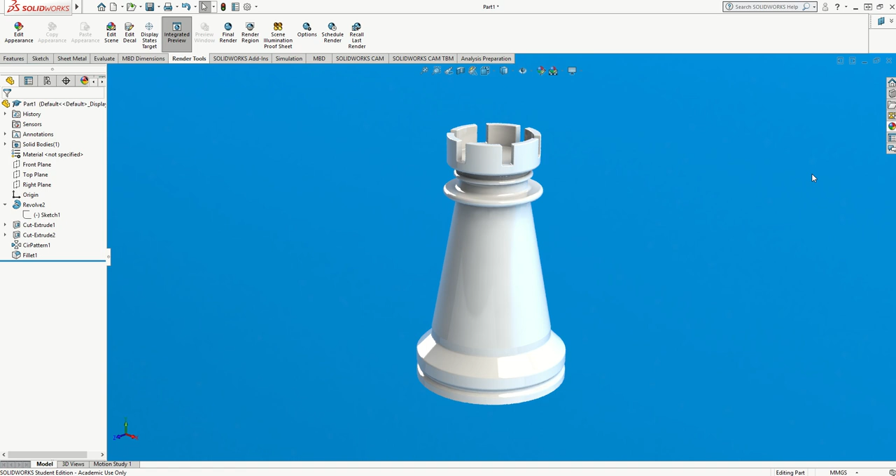In this video I'm going to show you how to draw a rook chess piece using mainly the revolve tool and a patterned cut around the top to make the castellations. I'm going to minimize the finished drawing and start with a new part,

and I'm going to draw my shape, or my section of my shape, on either the front plane or the right plane. I need one of the two vertical planes. I don't want the chess piece to be lying on its side when it's finished. And what I'm then going to do is draw a vertical line as a centre, which will later on become my revolved axis. So I'm going to make sure that's vertical, and I'm going to click OK.

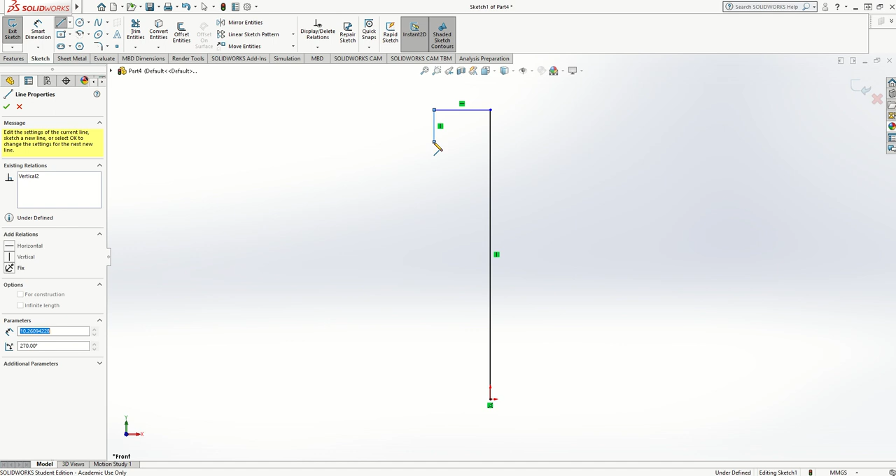I'm just going to use the mouse wheel now to zoom into a better position so the line fills the screen, and then I'm ready to start sketching my cross section of my chess piece. So I'm going to make up a shape that looks hopefully similar to a rook. Lots of different variations of this, so this is only one of my thoughts on this. Lots of small lines. Then I'm going to make it taper outwards slightly towards the base. Give it a bit more feature.

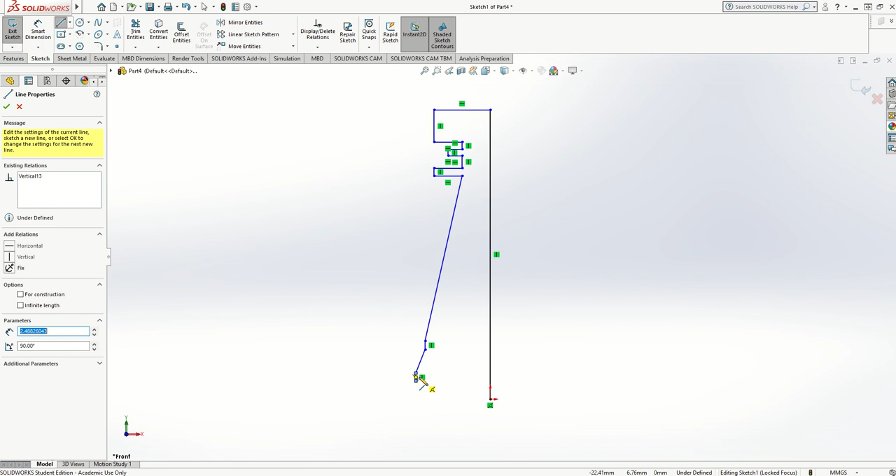And as I close the shape up, it should hopefully go grey, which it has, and that tells me that it's ready to accept a feature if I choose to apply one. But what I'm going to do first, I'm going to get rid of some of these sharp corners and make them softer by radiusing them. So I'm going to use my fillet tool, and I'm going to set quite a small fillet.

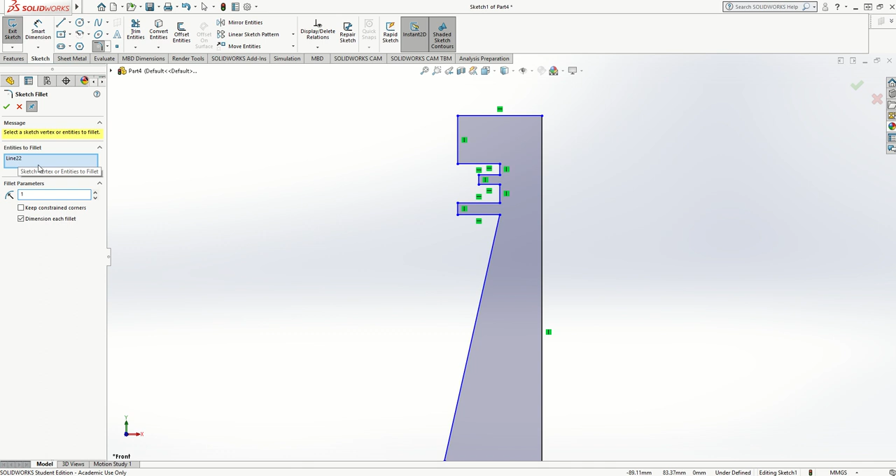I haven't done any dimensions on here, so I don't really know what's going to happen when I apply a fillet, but I can see line 22 still selected, so that's the one at the bottom. I'm just going to select that and get rid of that by pressing delete on the keyboard because I don't want to fillet anything down there. And then I'm going to apply my fillets on these upper parts, and that looks about the right size. So I'm just going to work my way down, applying fillets on there, and the same at the bottom.

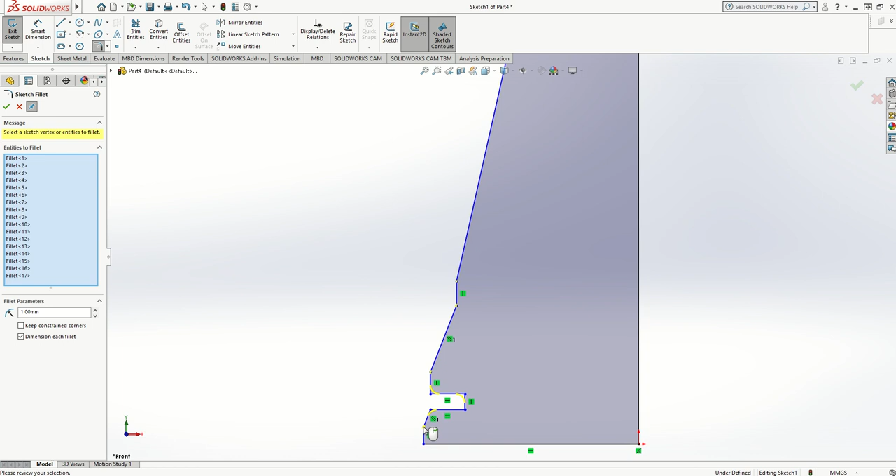This makes a big difference when you render the shape at the end because, oh, it doesn't like that one because it's a bit too small, so I'll miss that one and go back to it in a minute. Click all of those. I didn't like this one because it couldn't put another 1mm radius on, so I'm just going to select a smaller radius. I'll type in 0.5. Try that. There you go. That's worked. Click on OK. And I've now got what I would say is a half of a cross section of the chess piece. So the next thing to do now is make it a three-dimensional shape.

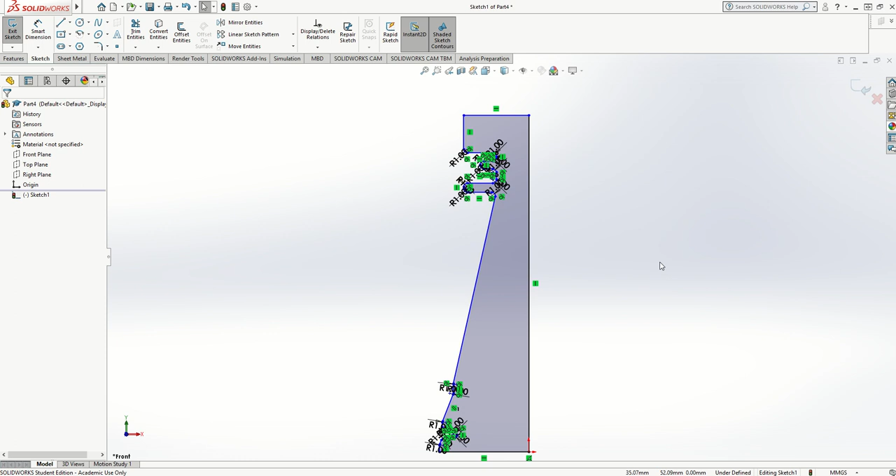So I'm going to press Ctrl and 7 on the keyboard, and then I'm going to go to my Features menu and choose a revolved boss base. Now a revolve needs an axis of revolution, and that's what that first line was that I drew. And when I click on that, you can see straight away it's guessing that it wants a 360-degree rotation. You can vary that and do part rotations rather than full rotations, but in this instance I want a 360-degree full shape. So I can now click on accept.

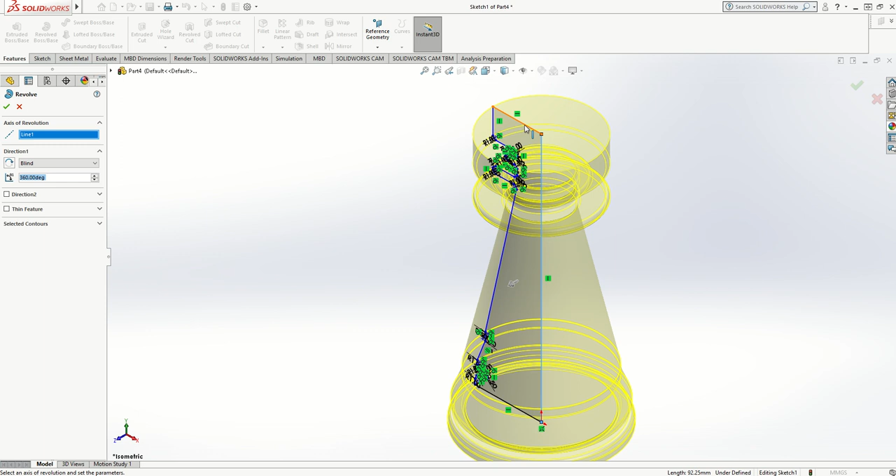Before I do that, I just want to show you what happens if you click the wrong axis. You can get all sorts of weird things happening, and it will create dish shapes and other shapes depending on the line you've drawn. So if it does do that, don't panic, just select the correct line. I'm going to click on accept, and that gives me my revolved shape.

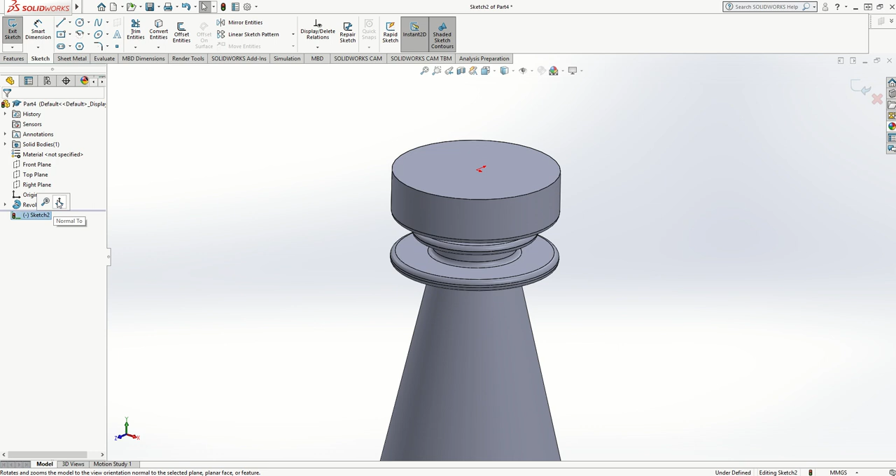Now at the top of the castle it needs to be hollow, so I'm going to select the top face and do a new sketch. Instantly a new sketch appears over on the left hand menu. If I click on that and go normal to, it will turn to face me, and that will allow me to put a sketch of a circle inside of the top circle, leave a little bit of a gap for a wall. Click on OK.

Now I'm going to go Ctrl 7 on my keyboard again, and then I'm going to do an extruded cut downwards. Extruded cut. I want to see how far that's gone, so I'm just going to rotate that up using my mouse wheel, pressing it down and rotating it around.

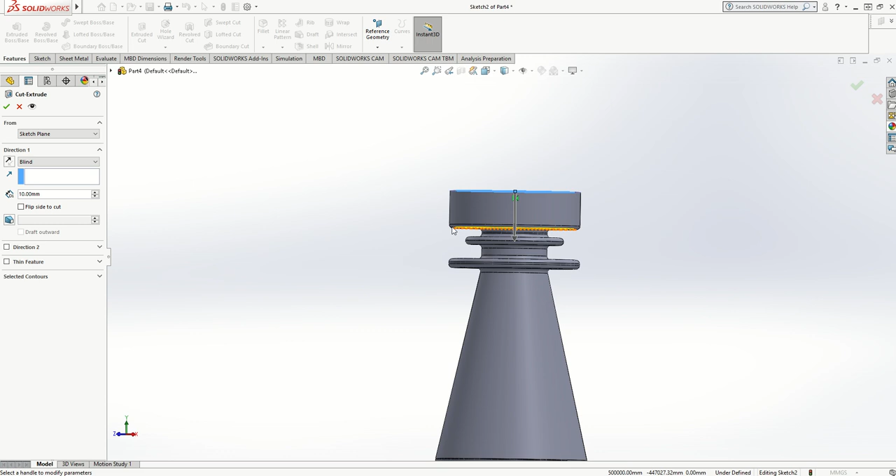That's gone too deep, it's going to almost cut through, so I'm just going to take that up a bit shallower and click accept, and I've then got my hollow section at the top.

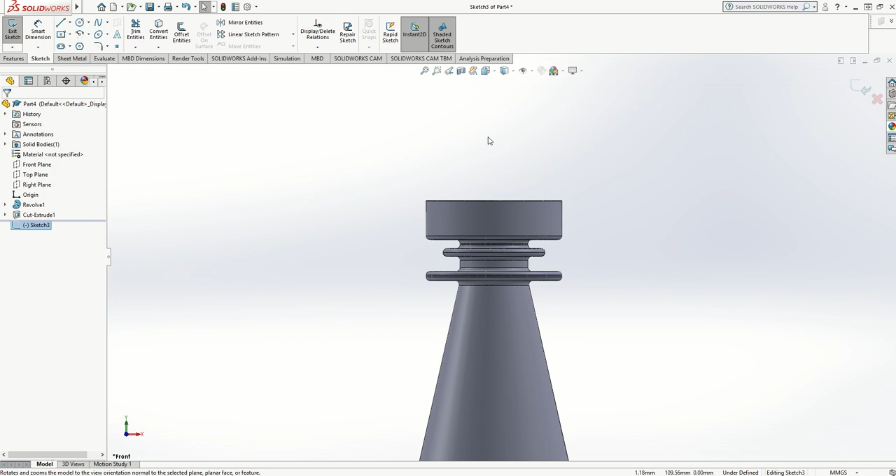The next thing now is to put the cutouts in the top for the castellations, so I need to do that by choosing either my front or my right plane. I'll choose my front plane and I'll do a sketch. Again, sketch has appeared here, which is my new sketch. I'm going to go normal to that, and then I'm going to zoom in near the top end, and I'm going to draw a center rectangle from the center line to whatever shape I want to cut out.

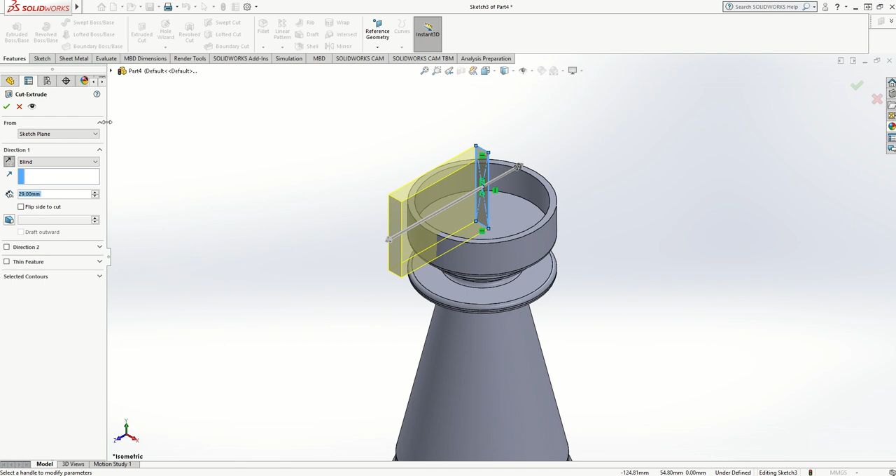Click on OK. I'm going to go back to Control 7, which takes me to isometric, and then I can do my extruded cut. Now the extruded cut will remove material, and I can go in either direction, frontwards or backwards. I'm going to choose to come frontwards, and then I'm going to click on OK, and you'll see it's removed a small cutout there.

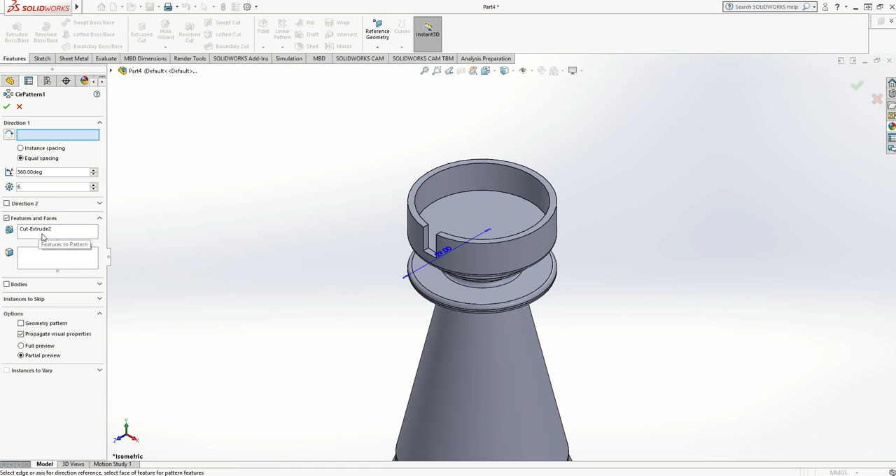If I now want to make a pattern of that around the edge, rather than trying to draw each one individually, I can go to my circular pattern from my features menu, and it will want to know what I want to pattern and what direction I want it to go in. Now, because cut extrude was the last thing I did and was selected in my previous menu, it's already guessed that might be what I want to pattern. And direction 1, I need to select the face I want to go round on.

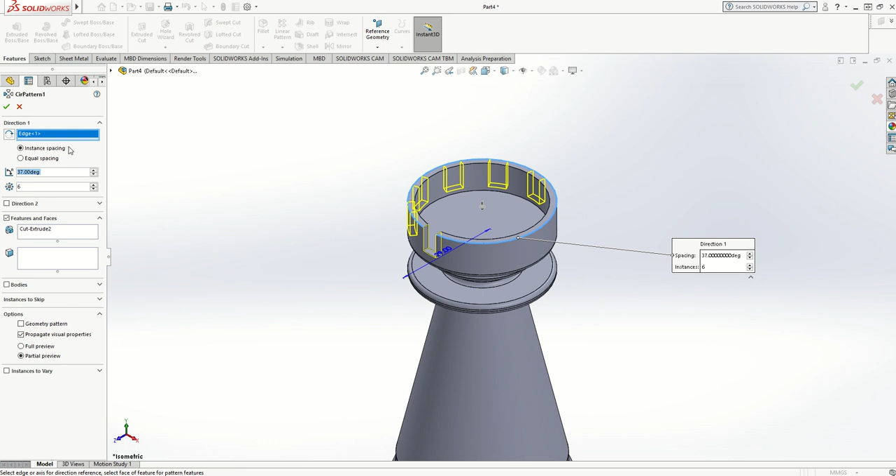Now you can see that it's guessed automatically I want 6 of these, but actually that's because I've already done some rotations recently and it's remembered my last setting. So I can change that to whatever number I want. I want 6 rotations in this instance, and I want an equal spacing. You can also type in an instance spacing, and you can type in the degrees that you want between each if you're doing a different type of pattern. But in this particular instance, I just want an equal spacing around 360 degrees, and I click on accept. And that gives me the castellations that I was needing at the top.

Now I can zoom in on this top end, and these sharp edges are going to need to be softened slightly before I render it. So I'm going to select all of those, but I'm going to use a feature fillet. I'm going to select fillet. The fillet's going to be very small, so I'm going to put 0.3 and see if that's small enough.

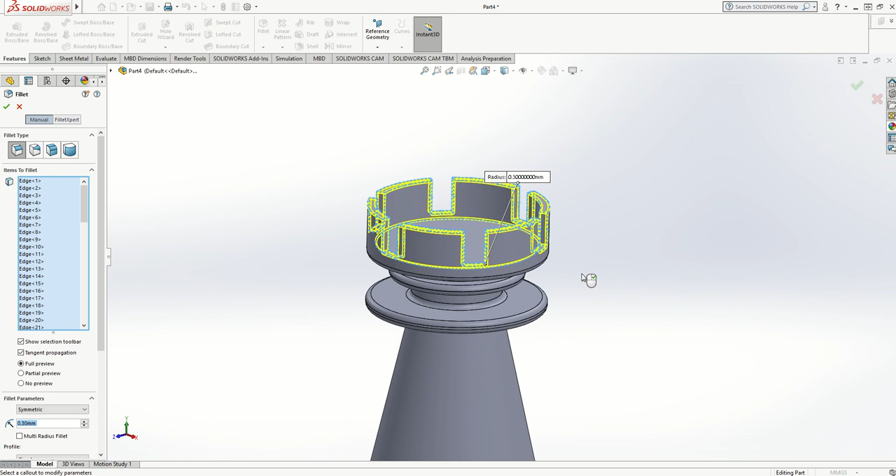I'm going to try and see if I can select all of the top edge fillets in one go. There we go, and that's selected all of those with a 0.3 fillet. I'm going to click on OK, and it just softens all of the edges, which makes it look a little bit better when it's rendered.

So that's the main shape done and revolved, and what I'm going to do now is apply some render colour to it. So I'm going to go into my picture over on the right hand side here, my appearances, click on there, and I'm going to choose from my stoneware. I can choose any one of these, it might look quite good. I might choose the porcelain one. I'm going to bring that on and drop it onto the shape, and I want it on the whole part, so in this case part 4.

Now it hasn't looked particularly impressive yet as a rendering. That's because it's still in the basic view, so I need to go up to my render tools. Now if your render tools aren't showing, it's because you haven't added them in. If I right click, and I'll turn mine back off, you'll notice the tab's now gone. If I right click on the grey toolbar at the top, you can then select your render tools, which will appear.

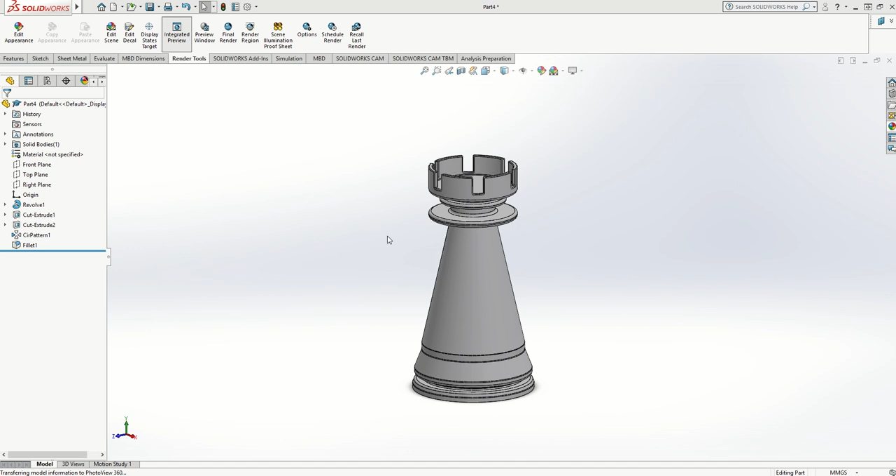Select the render tools, and I'm just going to do an integrated preview, and I'm going to turn on perspective view, which will make it look more realistic. It'll take a few moments to do depending on the speed of your computer, but you should then get something that looks like this. Now I'm just going to change the background colour.

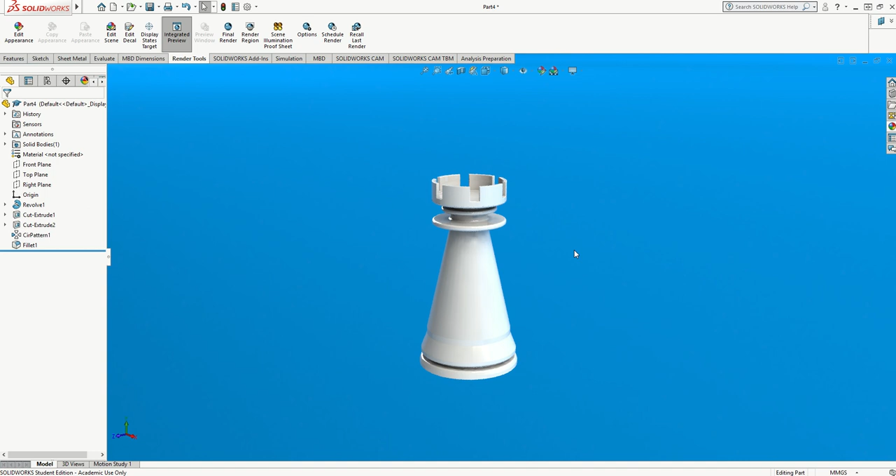I've got a few there in my favourites. I'm just going to select the 3-point blue to see if it helps it stand out a bit clearer, and you can see there that's just rendering up and looks a little bit better. And that's the end of the video.